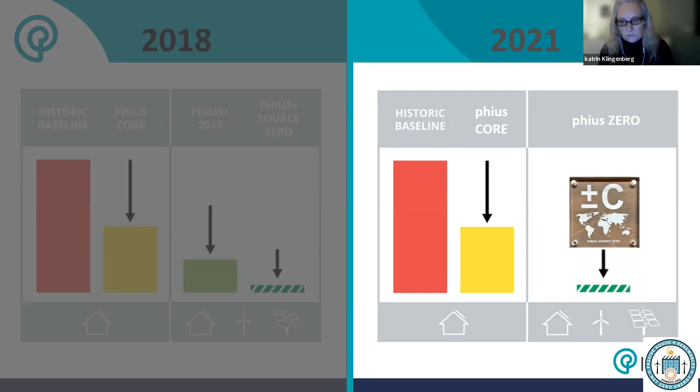So what we are left with in 2021, we're left with our original Phius Core certification and with our Phius Zero certification. So we dropped the source zero term also for clarification, because most people are completely confused by it. We also want to start talking to the broader general public, and people just didn't understand the term, and it doesn't really necessarily add much. It's still the same certification. So for simplification and clearer communication, we just switched to Phius Zero.

Okay, so that all said, over the last 2 years, really, certifications have ramped up like crazy, and the numbers that I showed during the conference in Tarrytown were actually way too small. We tallied everything up at the end of the year, and we found that we actually are at around 1,500,000 square meters and 16 million square feet of submitted projects within the Phius program all time. So that makes about 1,000 plus projects in North America and elsewhere in the world too, but they are still a fairly small percentage.

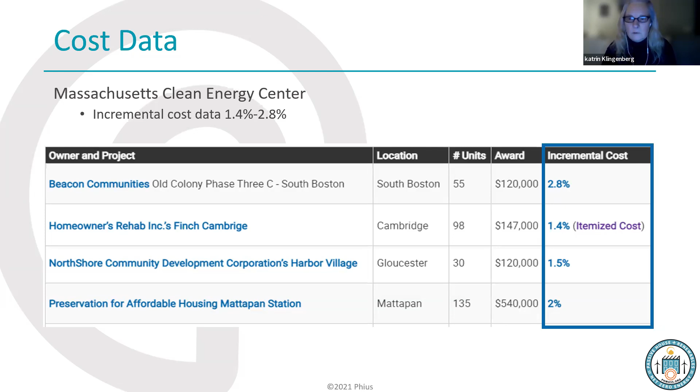Now, the not so good news is, since we're talking about retrofit, that's quite a bit of a different story, because retrofits tend to be custom and they tend to be more expensive. And that is maybe one of the most important cost hurdles that are still out there. And we'll talk about this when we get to the RMI, DOE, ABC collaborative conversation at the end.

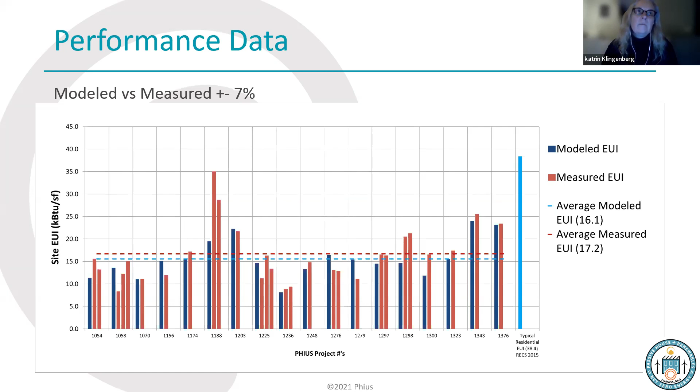Okay, so the good thing about, again, these incentive programs, even if it is initially mostly new construction and a few zero energy and a few retrofit projects mixed in here, we do collect data. We have excellent results in terms of performance compared to measured. And that data hopefully will come out of the Mass Save incentive program soon as well. And it is starting to come out of the Buildings of Excellence program that NYSERDA ran for the last couple of years. The Phius share of those selected projects was 44%.

And you can see on the right hand side, NYSERDA has published cost data and performance data already on their website, and they will continue to update it as they get measured data in. But at this point in time, Phius projects hands down perform the best at the lowest cost. So this is really, really great proof of concept information and data that we were hoping would come in that way when we first started to refine the passive building standards for climate and comfort and cost and so on and so forth.

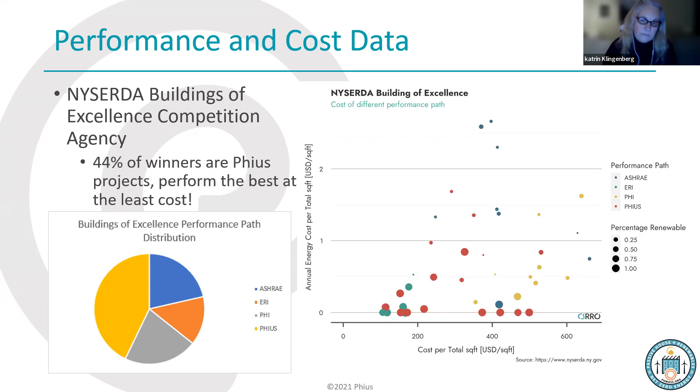So it does make a big difference. I feel like we really have achieved our goal. We have a really great system here.

So now to the certification programs. As we are rebranding, we're trying to reorganize and simplify that as well. So essentially, now we have two buckets. We have the new construction and the existing buildings bucket. And in the past, it was interesting because we had essentially just our Phius certification, and the existing building certification was a version with slight modifications of the existing certification program.

People actually didn't really realize that we had a retrofit certification program. So we decided to make that very clear and to rebrand, and basically now call the retrofit certification program Phius Core Revive. And then if projects go to zero, then it would be called Phius Zero Revive. And that goes back to one of the early slides that I showed you.

Now we only have these two tiers, like Phius Core. So essentially you are not required to go to zero. You meet all your targets on site with maybe a little bit of PV. And the Phius Zero, for that one, you would zero out your remaining operational energy. And you can do that by buying SRECs, by having on-site renewables, by community solar. So essentially we have those two tiers, Phius Core and then special expanded designation, Phius Zero.

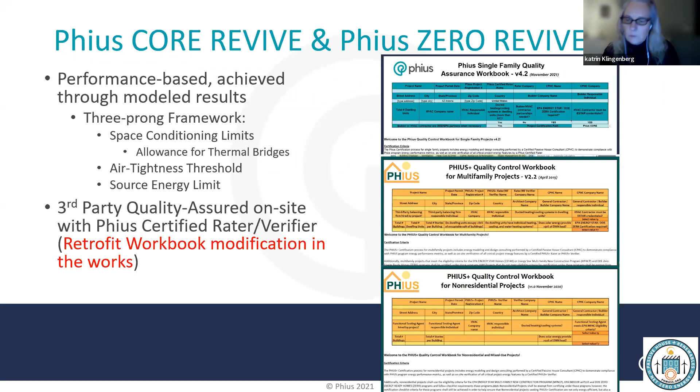So essentially, again, we have Phius Core Revive, Phius Zero Revive, and then whichever track you pick under your retrofit program, different workbooks for quality assurance apply. We have a quality assurance workbook currently for single family. We have one currently for multifamily, and we have one currently for non-residential projects. So that's how the certification currently is organized.

So I mentioned the start of the certification process is the design methodology and the optimized targets. For those, we have calculators. And for those of you who are certifying with Phius, you're familiar with those calculators that live, well, it's actually only one, lives on our website. And these are a couple of screenshots of the Phius 2021 performance criteria calculator.

And this is to show you that basically the calculator has a toggle, one for new construction and one for retrofit. So if you have not done a retrofit project before, you might have not known that that is the case, but it's really just as simple as flipping the switch in the calculator.

And as of right now, the base targets are the same for new construction as well as retrofit, except if you go through the certification process, there will be an assessment of these allowances for existing thermal bridges that I mentioned. So that is that.

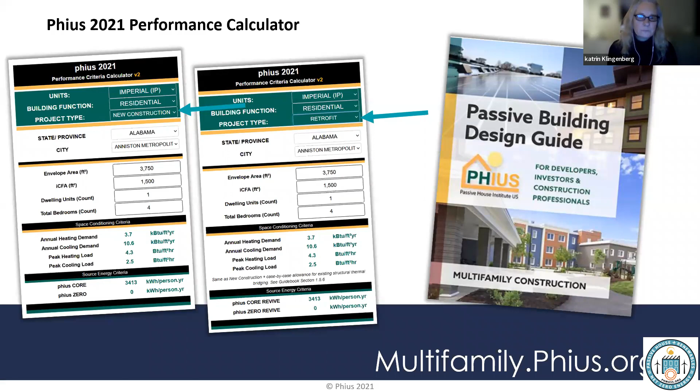And then for non-residential projects, same thing. There's another toggle up on top of the calculator. You toggle to non-residential from residential, and then again, you can toggle from new construction to retrofit, and you get your base targets again.

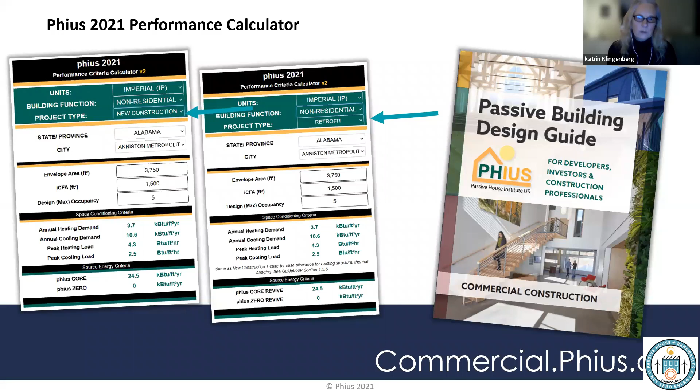And same rule applies, allowances for existing thermal bridges based on your specific project that you're working on and your specific conditions.

All right, so what are we doing about decarbonization strategy in general and embodied carbon? We get this question recently a lot, as a lot of policymakers are switching from an EUI metric, energy use intensity, energy use per square foot, to a carbon equivalent. And so we're working on getting that carbon equivalent. We already calculated essentially the source energy target. You can translate that into a carbon equivalent, but it is not yet part of our output in the WUFI Passive file, but we're working on getting that in there as soon as we can.

And for embodied carbon in materials, now this is an important topic that has come to the forefront. Obviously, if you look at essentially retrofitting the entire building stock of the United States, the share of embodied carbon becomes really significant. And we need to have measures how to assess it, how to reduce it and how to minimize it. The tech committee has been discussing how to best do that within our certification framework. And they have so far rejected specific carbon accounting because it adds a whole other layer of modeling and additional work and cost. And it is at this point really not super accurate either.

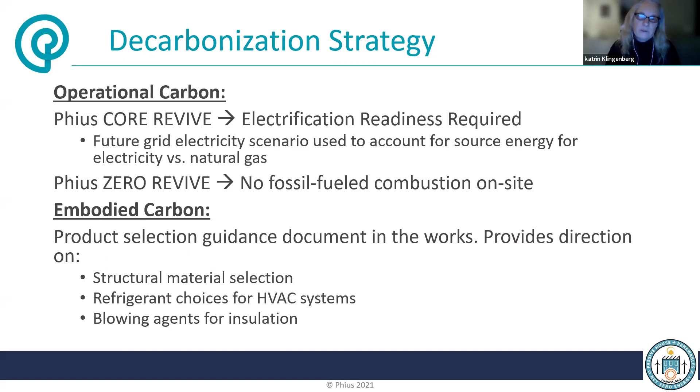So essentially what we're trying to say is, if you have a budget for a project, because most of our economy right now is running on fossil fuels, essentially the dollar amount of the budget will translate more or less into a carbon equivalent. So we're trying to leverage that to come up with a score that is simplified and easier to achieve.

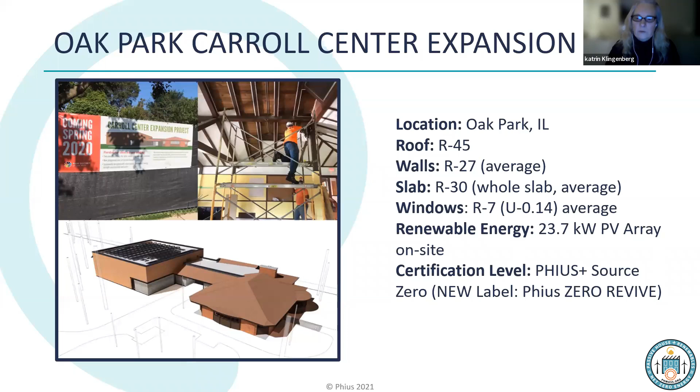So this is one of the winners of the design competition that we've had at the conference this year, a retrofit and partially new construction in Oak Park in Illinois. Really nice example. Historic building, also was quite difficult to retrofit. And they didn't just stop at the regular retrofit. They went with Phius Plus Source Zero. So that's the current label. If they had entered the certification process now, the new label would be Phius Zero Revive. So very cool project, nicely done.

Okay, so now this is the existing certification for retrofits that we've always had. Now we have renamed it, because over the last couple years, we've learned quite a few lessons through this industrialized retrofit project with RMI, and our community has given us a lot of feedback, as I mentioned before, regarding existing quality assurance requirements that we have and that make it really, really difficult. Some even have argued, I cannot go to these levels of envelope upgrades. Why can I not just put a bit more PV on my existing project to zero out my source and therefore also be carbon efficient, right? So all really good arguments.

So as a consequence of that, independent even from the RMI industrialized retrofit research that we're doing with DOE, we internally decided to create a Phius Revive pilot project to reevaluate these frameworks that we have put in place. Do we really need that level of upgrade in the envelope? Because we all know we have an incredible retrofit goal here. If we really want to do this for the entire United States, we're looking at an immense amount of carbon that will be necessary to be spent on envelope upgrades.

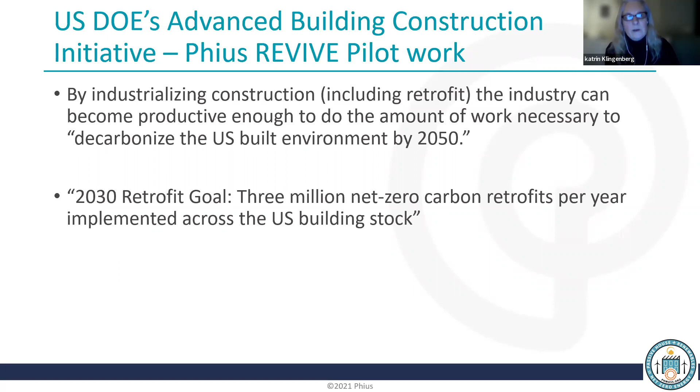So we're part of this ABC collaborative. And the goal is to figure out how to optimize and make the building industry more efficient and faster, and to be able to actually deliver these incredible numbers of carbon retrofits that we have to complete.

So the first portion of this DOE grant is aiming at writing a guidance report. We've done a ton of modeling, including a whole bunch of national labs, PNNL, NREL. They all have done an amazing amount of work to lay the groundwork to be able to judge from there how many buildings we have, basically an audit, what kind of buildings we have, who is the biggest operational carbon offender, and how this all plays out in different climate zones.

So this project is really, really ambitious. It's not just going to say, okay, we have most buildings in climate zone 5, and this is where we have the greatest potential of reduction. We want to do this for the entire United States, and we want to do this for all climate zones. So this is where the Phius Revive pilot came in, and we are tasked with writing this industry guidance report based on the modeling results from all the different team members.

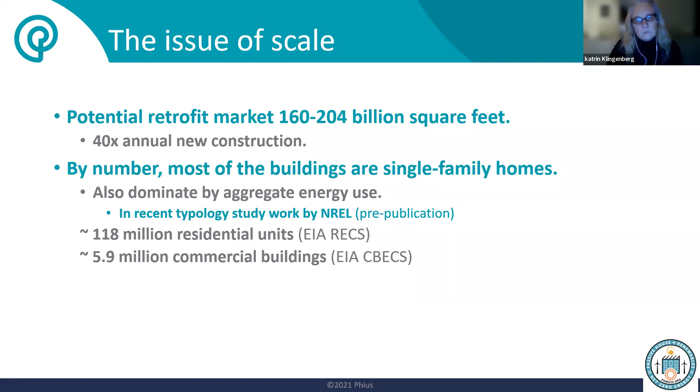And as you all know, that is the most difficult typology that we're dealing with, because the small home encloses a relatively small area relative to surface. So it is essentially the biggest energy user as part of the entire typology study that NREL looked at. And then of course there are also the commercial buildings, but really the biggest contributor is a single family home. So we kind of have to sit with that for a little bit.

That said, we are focusing on aggregating demand in the first round on multifamily buildings, because there are a lot of similar typologies. They have good surface to volume ratio. They're often a simple geometry that can more easily be retrofitted from the outside and benefit from an industrialized panelization approach in terms of window wall panels, as well as exterior applied, potentially individualized mechanical system units. So that's all being investigated. Not there yet. We're still in this first audit phase.

So when we are looking at this new framework for the Revive pilot, we are open-minded. We're going to say, well, maybe that performance-based approach is not the right one. That does not lead us to the right answer, because we need to rebalance the operational energy reduction and the related carbon, as well as the embodied carbon that goes into the envelope upgrade.

So what are our main priorities that should govern how far we go with our envelope upgrades? So for one, it's already clear that we need a really good quality assurance process that covers all phases. Nobody will have all the money to just go all in and do a deep energy retrofit. That's not going to happen. And if that is not going to happen, then we need a really good quality assurance process.

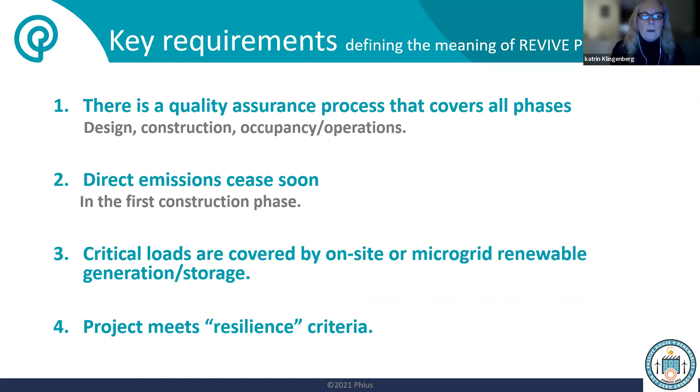So actually what I was just saying, maintaining this habitability, the renewable energy and storage is only a small portion, but the envelope can help us set the stage for resilience and minimize the energy that we need to keep ventilators running, to keep maybe a couple plugs running so that you can charge your communication devices, or whatever you consider critical, a fridge, whatever you have. So that was important to us as well, as part of the framework for the Phius pilot.

And then as another guardrail, of course, there is the total cost. We dubbed it the ADORB cost, which is short for the annualized decarbonization of retrofitted buildings cost. That cost is calculated based on dollar value. And again, that goes back to the concept I mentioned earlier, that right now our entire economy is run on fossil fuel. So essentially, $1 is equivalent to carbon emissions. So we can use that as a proxy at this point in time.

And we can use that for all these different positions by which we would like to determine the cost and the carbon impact. So the direct energy cost, the energy that we have to buy from a utility, the direct building retrofit measure cost, material and labor.

Then there's the social cost of carbon upfront, embodied, and the social cost of carbon operating. Now, we're assuming that there is some form of a carbon tax coming, and that is actually true already in quite a few jurisdictions, like New York City and Washington, D.C. They have already initiated the building energy performance standards, which basically say your existing building has to be X better in 4 years, and then we come after you again, and if you don't do it, you pay a big fine. It's essentially a little bit of a trick. Instead of doing a carbon tax, it's a penalty. It's the equivalent of a carbon tax, if you will.

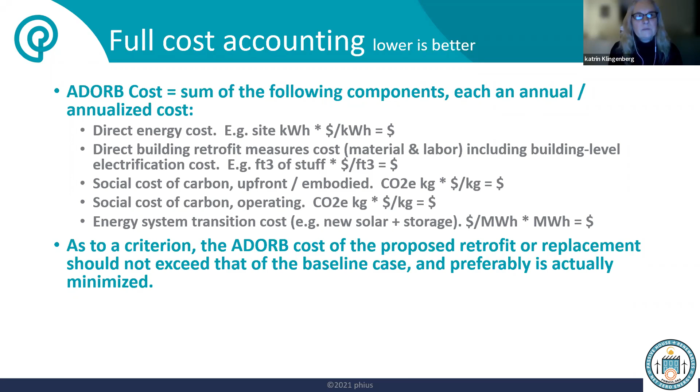And then last but not least, here in those bullets, we have the energy system transition cost. And again, for all of these different items, we're using basically the dollar as the indicator for how much carbon is in these different positions. So as you go through thinking through the design of the retrofit of a building, you will want to calculate this ADORB cost. Now, this is a super simple example right here from a single family building.

So essentially what we're looking at is, okay, if you don't do anything, you will continue to buy energy. So that has a certain cost associated with it. You will emit carbon through this operation, and we're assuming that there's a cost associated with that. And then you have maintenance that you will continue to spend fossil fueled dollars on. Once you calculate all that baseline over the years, that gives you essentially the cost that you should not exceed in your investment in your building. So ideally, your investment will be equal or better than that baseline. And at that point, it will actually start making you money.

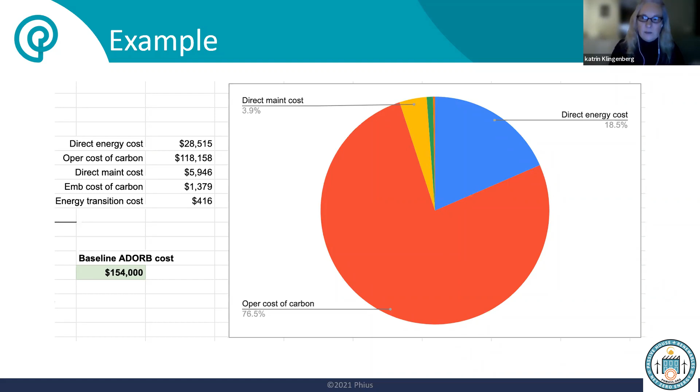So this is all totally theoretical, and I apologize for these word heavy slides. This is all still very much hot off the press. But of course, we don't like staying in the lab too long. We like pilot programs, pilot projects. I wanted to show you real quick here at the end one of our pilots right now. It's super exciting, and it's totally proof of concept that this new framework could work.

So this is a project in Washington, D.C. It's a sister building to the Watergate building, and I think a lot of people have an image of the Watergate building. I'm not showing a photo here to keep the clients private, but same architect, essentially all concrete. The building has not significantly been upgraded since the 70s when it was built. Concrete balconies that go all the way from the inside to the outside, single pane glazing, aluminum frames, boilers that are on their last leg. It's basically the best possible candidate for something like this.

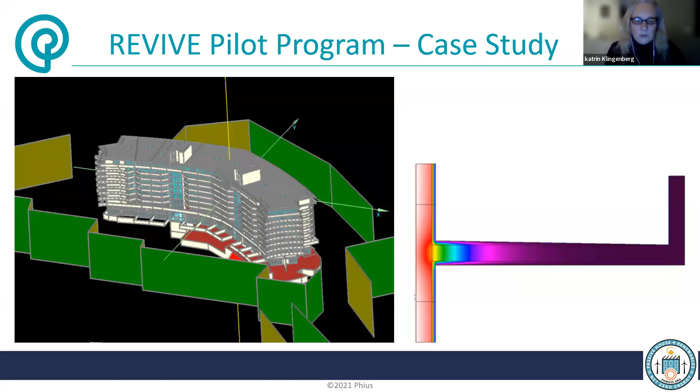But of course, that was not the only thing. We looked at the whole thing holistically, basically boiler replacement. Their boilers are about dead. Their hot water system, all is gas run. So if you try to electrify this, it's a really big building. It's 250,000 square feet. If you try to electrify without doing anything to the envelope, it became clear very quickly,

it's impossible. So essentially what they would have had to do was to replace the existing boilers with already outdated technology, i.e. more gas boilers. So what we were trying to do was to set them up so that they could actually replace their gas boilers with up-to-date heat pump systems and meet their peak after they would gradually upgrade the envelope, and that would include the windows. So that's essentially what you're seeing here.

We broke out all the different positions of upgrade opportunity, and then we came up with a phased plan for them that over time would continue to reduce the peak load. So now the first order of business is to replace those boilers because they're about dead. We can't wait for 7 years to replace all the windows around the entire perimeter. So we came up with a really good strategy here and basically said, well, we will size the heat pump replacement systems for your future peak load after we put in place all the envelope upgrades over the next, let's say, 7 years or so.

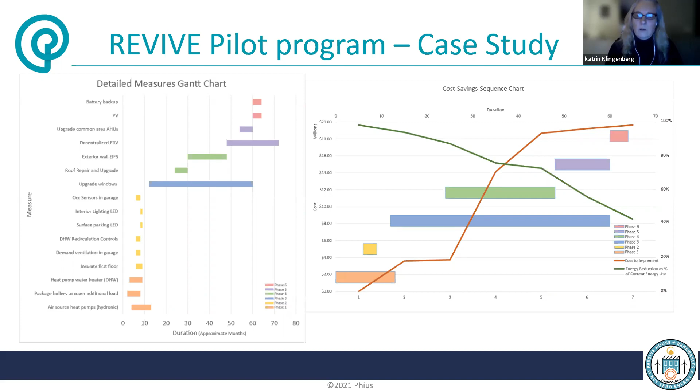And I will not lie to you, this was hard work, and we learned a ton, but also we were really hopeful in the end that this can be done, that it can be financed over a period of time, and that we can get everything we really think we want and need from that improvement, including the resilience and habitability for the building, including renewables on site that will make sure that critical loads are still met.

We will be resilient should the power really go out. We have created resilience calculations that we hope, based on these case studies, we can turn into calculators for you guys. If you are starting to embark on these larger or small retrofit projects, you can easily see if your building actually meets that resilience criterion. And those different guardrails will allow you to back out the envelope upgrades and minimize, therefore optimize, the carbon that we need to invest in the envelope. So that is the really good news here.

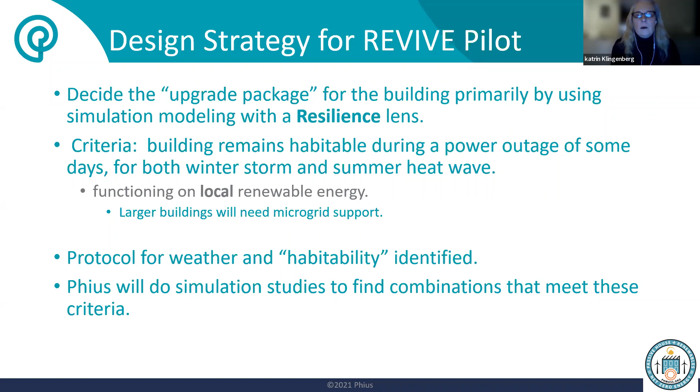Last but not least, this will require a new commissioning process also, new players in the design, and maybe we're starting at the really complicated end with a really big building. But if we can do it for a really big building, we can do it for a small building. Now the financing part, that is still a hard one. Probably not for these really big projects, because there are already people lining up to become essentially an energy service provider. They would finance the improvements into the building and then get paid back by the savings.

As I was saying earlier with the ADORB cost, as long as your score for the ADORB cost is equal or better than the baseline of continuing to operate your building as is, plus the maintenance that you have already figured into your budget, as long as you're equal or better than that, your building will make money.

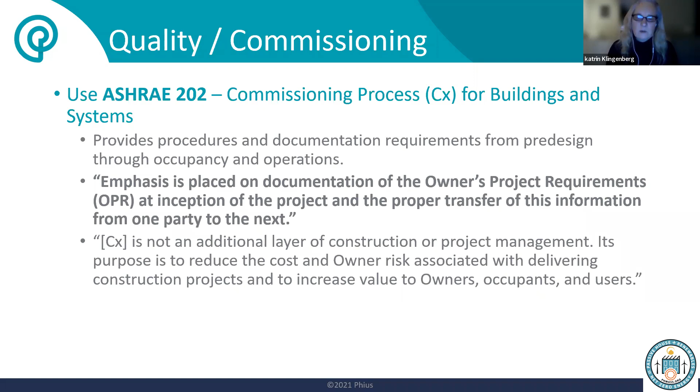So that's why that ADORB cost is so important, in addition to any kind of resilience criterion to identify the level of envelope upgrade necessary. So in summary, key requirements for this new Revive pilot program, whenever we get to establish it in more formal terms, is a very detailed quality assurance process that covers all the different phasing, that helps folks to come up with that basis of design for the owner.

Our main goal is electrification, direct emissions cease as soon as possible. And we definitely want to make sure that the habitability is there, that we will cover the critical loads in case of outages or extreme weather events. And what we have to address is land use, like maybe the building should be torn down, something like that. We want to decarbonize and really, we probably need to get at some point to absolute zero in terms of decarbonization. We can't do it today, but we do our best to work our way forward on that front.

We have to address cost, finance, and equity. Right now, this is kind of crazy. I'm not entirely sure that these BEPS standards, that it's really fair to put the upgrade cost on the homeowner or the condo owner. This is a big lift, so we really need to think about this. Resilience for sure, we talked about this, health and quality, getting rid of existing deficiencies like asbestos or lead or whatever that is, upgrading the ventilation system. I'm in an 80s condo building and the ventilation is horrible.